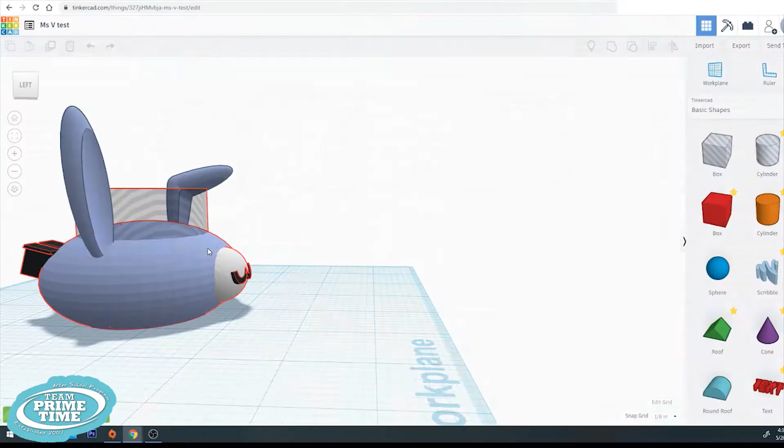First, sign into your Tinkercad.com account. Choose the project you will print and click Tinker This.

I always check my project before printing. I want to make sure everything is aligned how I need it and that the project is on the base, 0, the Z-axis measurement. I also try to center the project on the grid as best as possible.

After verifying everything, I click the Export button in the upper right corner. Make sure you have the option Everything in Design selected so you print the whole project.

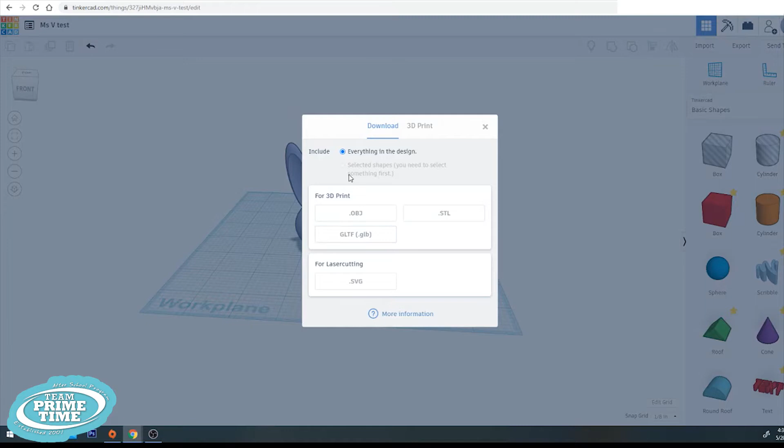Each printer is different, but we will be using a FlashForge Finder printer. This printer uses STL files and converts them into a GX file for printing.

Once clicked, the project will download. Open the project by double-clicking the item. I already have my 3D printer software installed.

Each printer uses different software, and there are free conversion softwares online for different brands. FlashForge is great because it already has its own software called FlashPrint that allows you to easily input with the printer you're using, so printing is simplified.

The program opens my project. I hit repair as sometimes there are small issues with the print when converting.

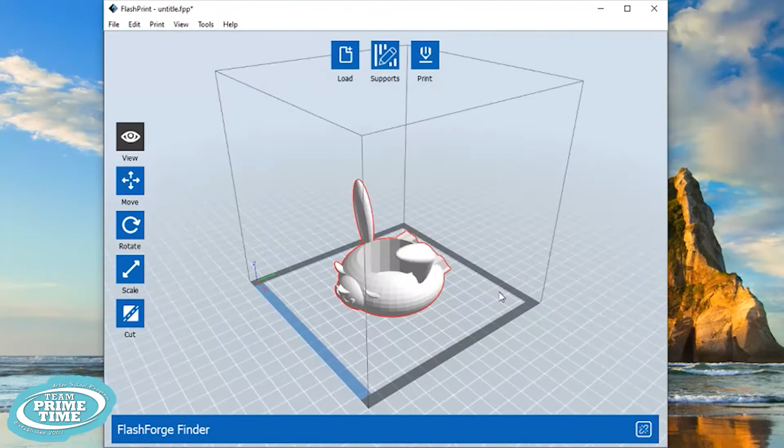The FlashPrint software comes with different options, but there are a few you may use often. The Move tool to move your object on the plane, the Rotate tool to turn it on the X, Y, or Z axis, the Scale tool to make bigger or smaller prints.

If the box turns red, you're out of the printing area of your printer, so be wary of that. The Cut tool, which allows you to slice your project in half.

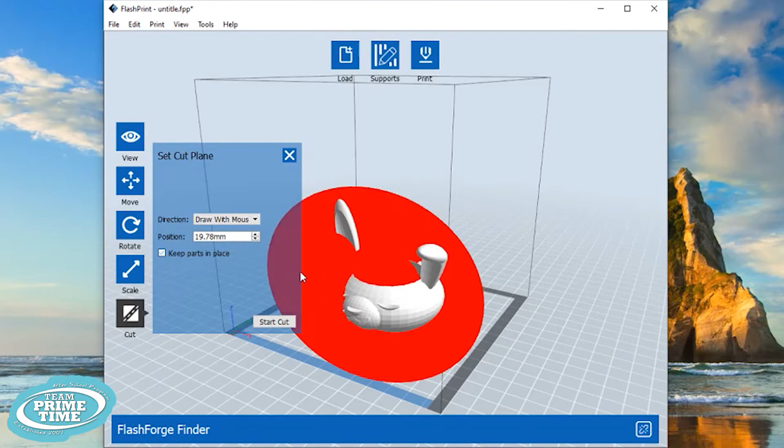Next are support options. Sometimes when a print is top heavy, you need supports. The ears and other parts of the print need support since they stick out.

There are two kinds of supports, tree-like and linear. Tree-like has less connection spots, but they tend to be harder to remove. Linear has more connection spots, but is thinner and easier to pull off of your print.

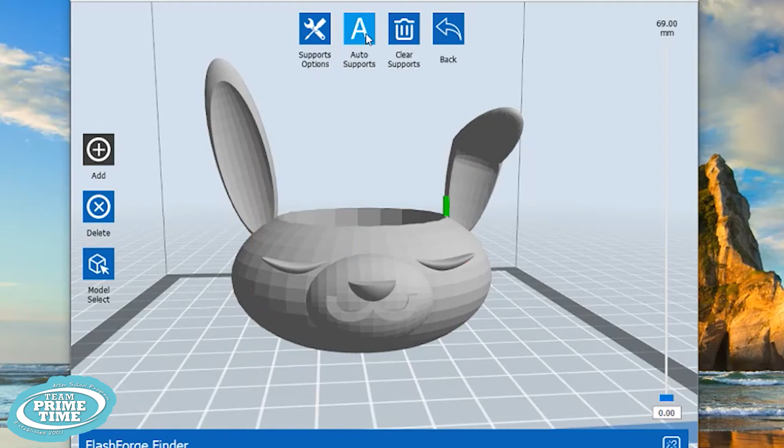You can use auto supports to find areas that need supports, but you can also put them in manually. I prefer auto as it saves a lot of time.

I save the project file. Next, I hit the print button. This is so I can have my GX file for my printer.

I save the GX file and then open up my document folder, put them onto a USB. You need a USB in order to get the file onto your 3D printer.

In the future, I'll go into depth about printing from a 3D printer and the screen dialogues.